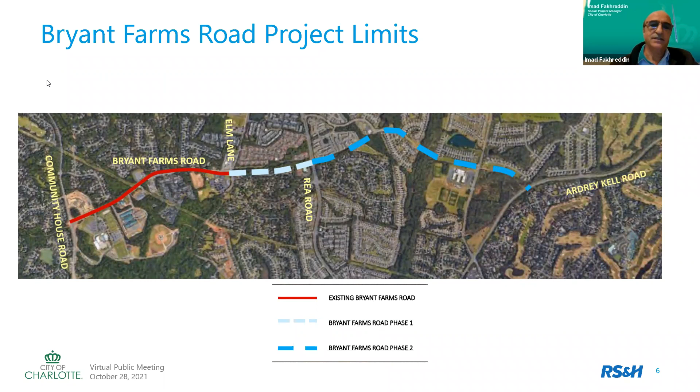Bryant Farms Road has been on the thoroughfare plan since the 1990s. The majority of the developments in this area south of I-485, including I-485, started in the 1990s, except for the Raeburn, which was built in the mid-80s.

These new developments along the Bryant Farms Road extension reserved the right-of-way for this road, and in some areas constructed sections of the road within the development area, just to connect to the local development roads, or in at least one case to connect to the main road.

City transportation projects are funded by the transportation bonds. Charlotte citizens vote on the bonds placed on the ballots usually every 2 years. Phase one of the Bryant Farms Road extension was funded by the 2018 and 2020 bonds. You can find more information about phase one by going to charlottefuture.com/BF1. It's for Bryant Farms phase one.

Phase two extension is currently funded for advanced planning only. This includes all the process for the planning, like geotech work, environmental investigation, and also preparing the concept plans, which will be summarized in a planning report. Funding for the final design, real estate, and construction will be included in future bonds. Next.

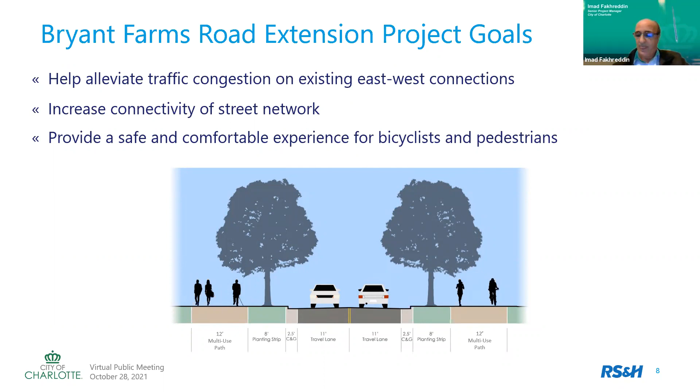And the third goal is to provide a safe and comfortable experience for bicyclists and pedestrians. The city includes pedestrian and bicycle amenities with every major project, and for this project, we included a multi-use path for that purpose. Thank you, Jenny. And next.

And Jenny will go through the Bryant Farms phase two process. That's phase two between Rea Road and Ardrey Kell. Go ahead, Jenny. All right. Thanks, Imad. As Imad mentioned, phase two will extend Bryant Farms Road from Rea Road to Ardrey Kell Road. That's a total length of about 1.2 miles.

Phase two includes some new location sections as well as 2 existing sections of Bryant Farms Road. The new location sections are shown with dashed lines on the map, and the existing sections are shown with solid lines. We anticipate that the project will involve reconstructing some of these existing sections of Bryant Farms, and will be providing new full depth pavement.

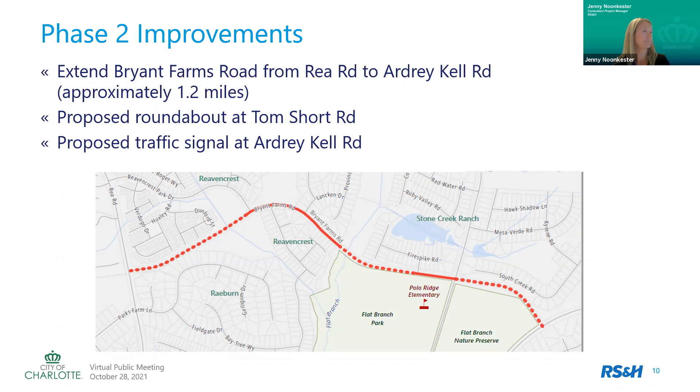The project includes improvements at the intersection of Tom Short Road, where we're currently proposing a roundabout, but that is subject to change. And then we also have a new traffic signal proposed at Ardrey Kell Road. We're in the advanced planning stage for phase two, so we've been doing a lot of data collection and coordination. This slide summarizes the activities so far. We've analyzed traffic operations and looked at crash data.

We've conducted initial surveys for environmental features like streams and wetlands, threatened and endangered species, historic properties, and hazardous material sites. We're coordinating with environmental agencies, and we'll continue this coordination through the plan approval and permitting process. We've also conducted an initial hydraulic evaluation because we have the crossing of Flat Branch, and we want to ensure that we're not causing any rise in floodwater elevations in that floodplain area. So we will have additional coordination with FEMA as the project moves forward.

And lastly, we've taken an inventory of the existing utilities in the project corridor and identified any conflicts with utilities out there. Based on all this information collected to date, as well as some stakeholder coordination, we've developed a concept plan that we're going to share with you tonight. Imad mentioned we're also working on a planning report that will document everything we've done in the advanced planning stage, and it'll be available for review on the project website once completed.

As part of the planning process, we looked at several different typical section options that had different combinations of bicycle and pedestrian accommodations, planting strip widths, medians, and turn lanes. We reviewed all those options in light of the constraints identified in the project area, as well as the existing reserved right-of-way width, and we really tried to balance our project goals with minimizing potential impacts.

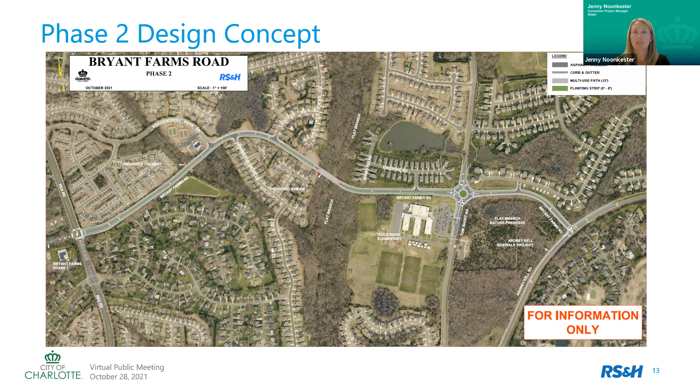And at this time, I just want to take a few minutes to walk through the current concept plan and discuss the project in a little more detail. And again, I'll note that this is an initial concept and it is subject to change as the design progresses.

So I'll start with an overall view of the corridor. You can see it extends from Rea Road here on the western end and continues through the existing section at Ravencrest, and then across Flat Branch and on the existing section behind Polo Ridge, crosses Tom Short Road, and then the eastern end is at Ardrey-Kell Road where that new signal is proposed.

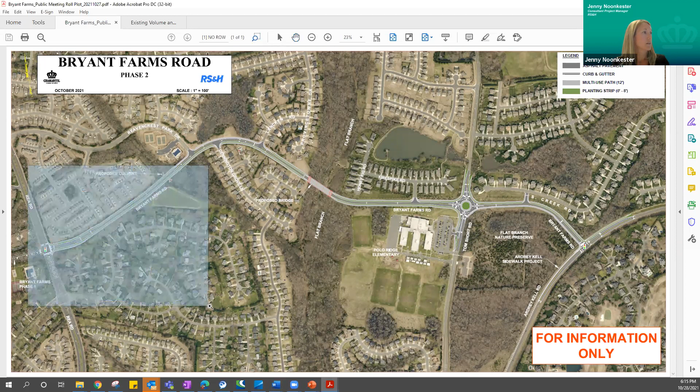And I want to zoom in just a little more and walk you through a little bit more of the design detail. Starting at Rea Road, there's a new traffic signal that we're anticipating will be constructed as part of phase 1. And then phase 2 will continue on new location behind the Raeburn neighborhood. The light gray on this map indicates that multi-use path, and then the green is showing the planting strip that separates the multi-use path from the roadway.

You'll see we have a proposed culvert where we cross a tributary to Flat Branch, and then we move into that existing section in Ravencrest. And we have a left turn lane that is proposed to Ravencrest Park Drive. And I will note that we anticipate replacing the existing pavement in this section, and some additional right-of-way may be needed through here. And we also have left turn lanes proposed for Dennington Grove Lane and Lancken Drive.

And then we move across with the proposed bridge that we have over Flat Branch, and then move into that existing section behind Polo Ridge Elementary School. And again, we anticipate reconstructing this section of the road and replacing the existing pavement.

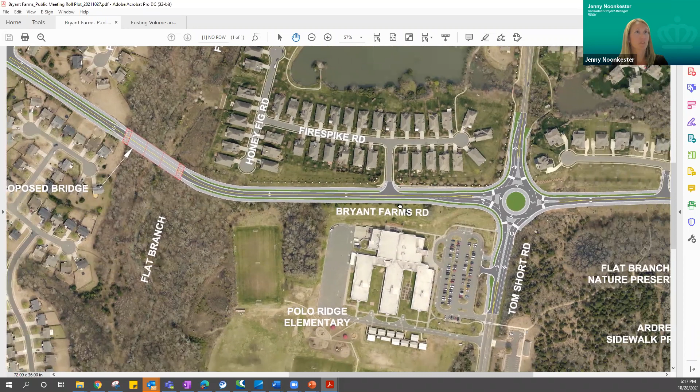And our current concept does have that roundabout proposed at the Tom Short Road intersection, which again is subject to change. And then we move east behind Flat Branch Nature Preserve, where we do have a connection to South Creek Road, and then continuing on to Ardrey-Kell Road, where a new traffic signal is proposed. And here we will connect with the Ardrey-Kell sidewalk project that's currently under construction.

And since I mentioned the Ardrey-Kell sidewalk project, I will say that it's a project that will extend new sidewalk on Ardrey-Kell from Tom Short Road to the existing sidewalk that's near Stone Creek Ranch. And you probably noticed that construction recently began on that project, and it's scheduled to be completed in the spring.

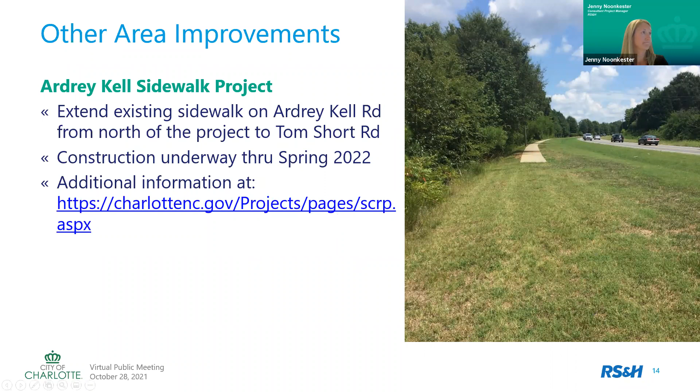In terms of next steps for the phase 2 project, as Ahmad mentioned, it's currently funded for advanced planning only. We have some limited funds to continue work on the design plans, but additional bond funding will be needed for the final design and construction. We're hopeful that those future transportation bonds will be approved, and then we'll be back to provide additional information once that project is funded for design and construction.

If you have any questions about the phase 2 project, please go ahead and type those in that Q&A box, and we will get to those at the end of the presentation. But at this time, I'm going to hand it over to Roman to give some updates on the phase 1 project. Sure. Thank you, Jenny.

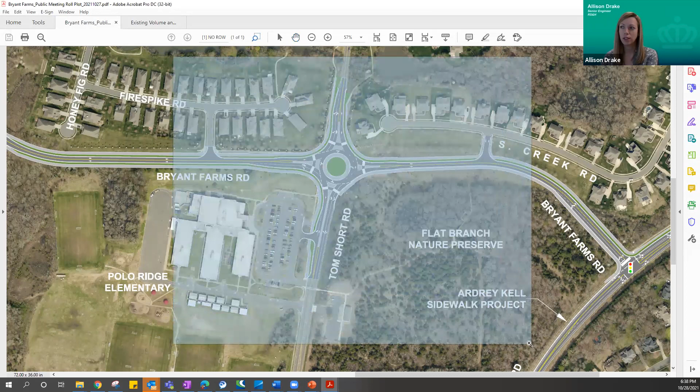And also I saw one other question about school traffic for Polo Ridge, and I just wanted to note that we have been coordinating with CMS and with the NCDOT school access program. So we have been coordinating with CMS and getting additional information about that school traffic. So just wanted to provide that information for that one question.

There's another question that's come in about the Raven Crest Clubhouse and pool, if there would be any privacy structures for that. So I think as we get farther into the design process, we'll be looking at all sorts of items and making sure that we're working with the residents that are affected as the project goes through. So just give us the time to get started into the design phase, and we'll definitely be coordinating with all of you on that.

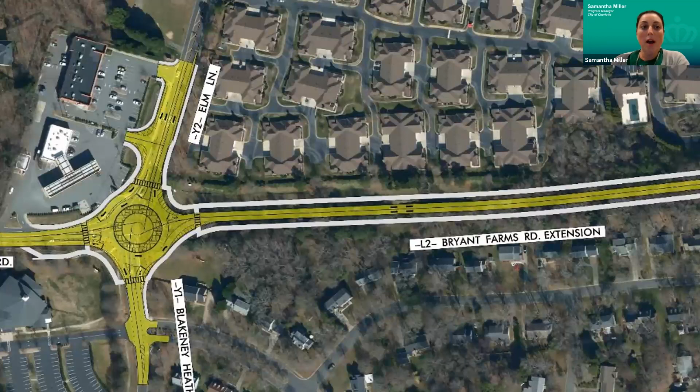Jenny, there is another request to zoom in at the Elm Lane and Bryant Farms Road intersection as well. And I'd like to point out for phase one, this is very conceptual. Our design build team is working on their design. So what you're seeing is what came out of our planning phase. So please understand that we are continuing design efforts to work with NCDOT and to work with property owners in this area to actually refine this design.

Looks like there might still be a few more questions coming in, so we'll give everybody just a few moments.

And Allison, I will just say, and I'll go back to the screen here in a minute with the websites for the projects. So if you want to go back and watch this recording or look at any more of the presentation in more detail and submit any questions through the project website, someone from the project team will get back to you on an answer for those as well. So if you don't think of everything tonight, that's fine. We'll still be available to respond to questions through the website. And any questions that we weren't able to answer tonight that we said we'd get back to you on, we've got those recorded as well, and we'll be getting back to those citizens as well.

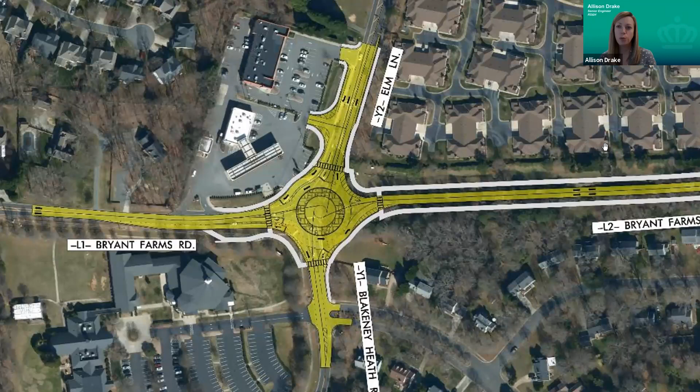So we've had a few more questions coming in. One is a request for a statue for the project. So we love public art. We always have to think about safety first, but we will look at any considerations that we can look at. Great, thank you, Samantha.

I'm guessing he wants a statue of himself, though. It didn't specify in the question.

The next one is about how will traffic be routed when the roundabout is constructed? I'm not sure if that one was meant for the Elm Lane roundabout or the Tom Short roundabout. So I don't know if we have an answer for both there. Yeah, so obviously on phase one, it's on Elm Lane. Okay. Yeah, so the phase one team will be talking about traffic control during their informational meeting as soon as they finish their design. So they will be getting back to you on the traffic control and the timeline, obviously, because it'll be slightly different than the normal traditional process.

Great. And another question about that roundabout. The question is, it looks big. Are there various sizes being explored? And I suppose that probably applies to really both of the roundabouts. So I will say on the phase one roundabout, the design team is still looking at that design. And like I said before, it is very conceptual what we're showing you on the screen. It's not representative of where we are moving through design. So just understand that we will be coming back to you on that phase one. On the phase two roundabout, again, it's conceptual, and we are continuing to evaluate and make sure that we're accommodating traffic properly.

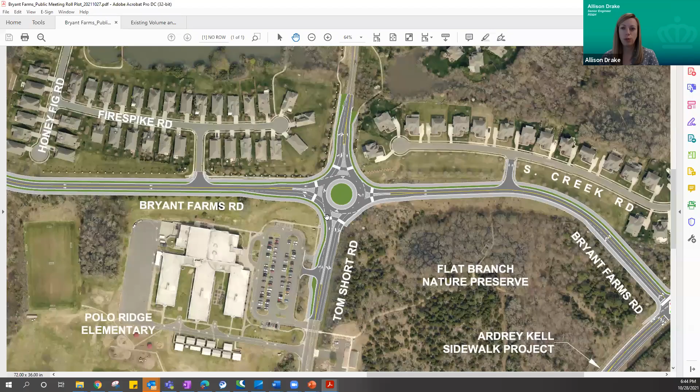Okay, Jenny, there's a request to zoom in on the Bryant Farms and Rea Road intersection. And then there's also a question that's related to this one. It's asking whether the current left turn off of Rea Road into the Ravencrest neighborhood would be eliminated so that traffic would not turn left down Ravencrest Parkway when there's traffic backed up on Rea Road to use Bryant Farms as a cut-through route. Erin, do you want to handle this left turn question? As of right now, we are not looking at options to remove that left. However, we will look through it. CDOT will look into that and follow up with a response here in the future.

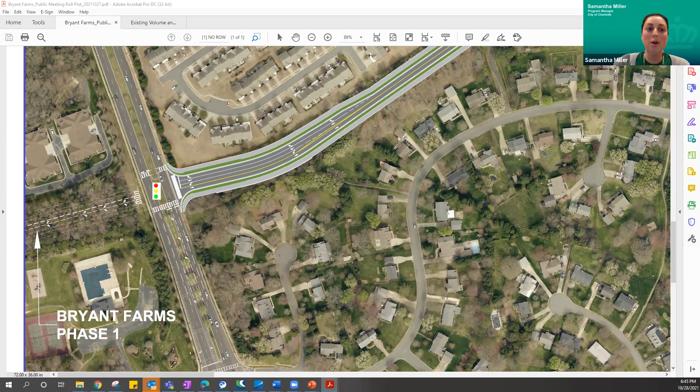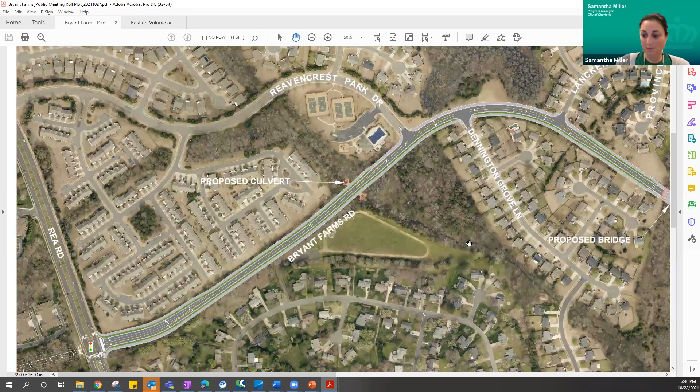Thank you, Erin. And it looks like the last question we've gotten is just again about the public art. Looks like there's just some more desire for public art in this area, especially in Ballantyne. Yes, as always on our projects, we look to see where we can incorporate public art to make our spaces more beautiful throughout the city. Again, we'll take a brief pause. If there's more questions, please feel free to type those into the Q&A box on your screen and we'll continue to answer questions.

Okay. Next question that just came in is, what does culvert mean? Yeah, so a culvert is just a drainage structure that we put underneath the road for the water to flow through. So imagine it's basically a square pipe.

All right, and then just a little bit of additional clarification on a previous question about that left turn off of Rea Road, just to get the clarification there that there are no plans to currently block off that entrance to Ravencrest. No, CDOT at this time has no plans on removing that left turn lane from Rea Road onto Ravencrest. And I will add to the citizen who has asked that question, if you need more follow-up, please feel free to reach out to Ahmad and we can have more conversation offline about this if you have more questions.

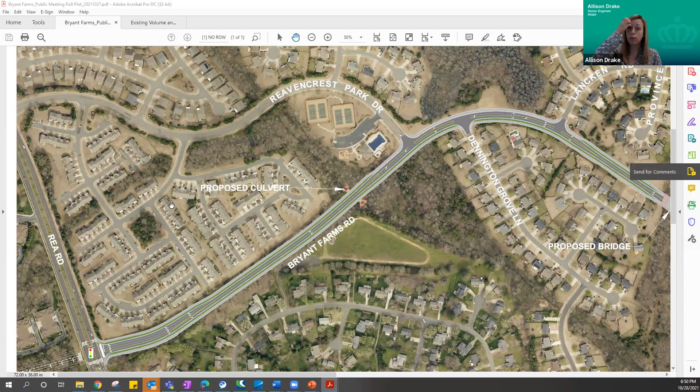This question is regarding Park Farms and Bryant Farms, and I believe we talked about this a little bit earlier, but just to confirm that the light will remain at Park Farms. Yes, that light will remain, and we have coordinated with NCDOT and have received concurrence from them for us to retain the traffic signal there and put in the new one at Rea Road and Bryant Farms.

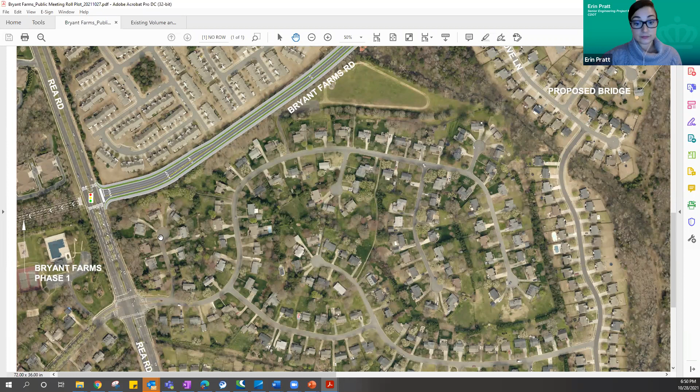Next question, how are you addressing the potential difficulty going in and out of Stone Creek Ranch at Tom Short and Bryant Farms? So Erin or Maude, have we done any analysis at that point yet, or are we still looking at that? So we're still looking at that, and that's going to be what we'll be evaluating when we have approved funding to move forward with the design phase. So we will definitely be looking at that and how everything will be impacted.

Again, just waiting on some questions to come in. Panelists, feel free to add anything while we're waiting.

Allison, did you see the question about potentially widening Ardrey Kell? I know Erin touched on that earlier, but it might be somebody that joined later. Yeah, if we can pass that back to you, Erin. Sorry, I lost my mute button. Yes, so Ardrey Kell is a DOT facility, and so our recommendation is if you have any further questions regarding Ardrey Kell, we'll defer you to NCDOT, and we can put in a contact at a later date for you to reach out to NCDOT to ask your questions regarding Ardrey Kell.

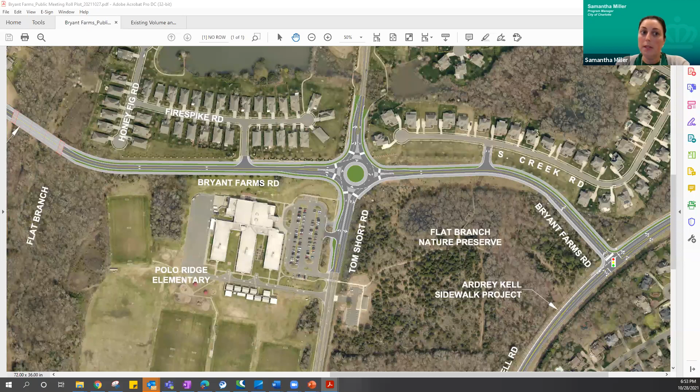There's a question, how will the complete road compare to Ardrey Kell and Ballantyne Commons? So obviously our complete street will include a multi-use path and the travel lanes. So that would not be the same as what's on Ardrey Kell, which is sidewalk. But this typical section is consistent with what we are doing as a city for our streetscapes. I don't know if you want to add in anything else on that. No, you answered that pretty good.

All right, we had someone that said they joined a little bit late, so they might be asking a repeat question, but there might be multiple people in that situation. So again, what is the timeline to begin phase 2 and then also phase 1 as well? I saw a question on that. Yeah, so phase 2 is not currently funded for design and construction. As soon as we have determined the funding years for that through our bond program, then we'll be able to update the public on the timeline to move forward. And phase 1 is currently going through the design and build process. Our design build team is working on getting through the design, and they're going to be coming out to you with an informational meeting and updating you with a schedule.

Okay, and there was a question about adding a left turn signal at Tom Short and Ardrey Kell coming from Polo Ridge with the traffic congestion that's existing there today. Yep, so with this project with Bryant Farms, we're not doing any impacts at the intersection of Tom Short and Ardrey Kell. However, as I previously mentioned, that is a DOT facility, and we can definitely reach out to DOT and inquire some more information for you regarding this item, and we can pass on the comment.

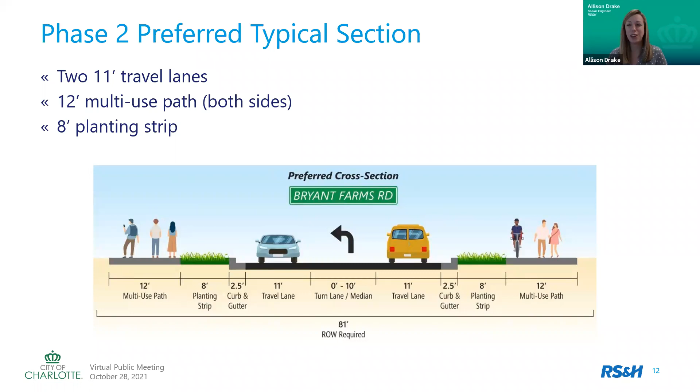And I'll add to that, if there was concerns with potentially impacting the athletic field, we are reviewing any impacts that we would have as we're going through the project corridor. That is part of the design process that we have.

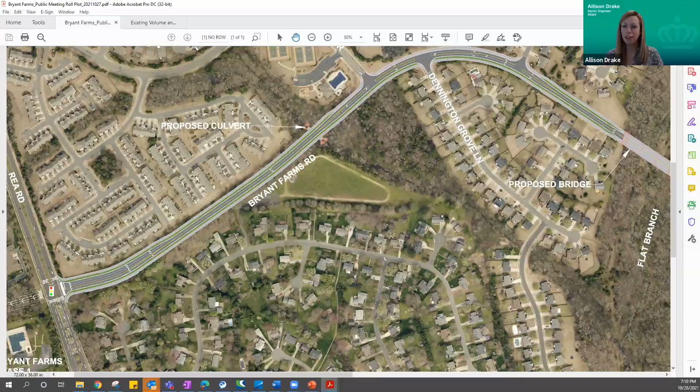Okay, and a question came in: what would the road look like between Elm Lane and Rea Road? They saw the phase 2 typical section. Is it the same typical section in the phase 1 section? Yeah, so the phase 1 typical section is similar in terms of the 11-foot travel lanes as well as the 8-foot planting strip and multi-use path. So it's a consistent typical section from phase 1 to phase 2.